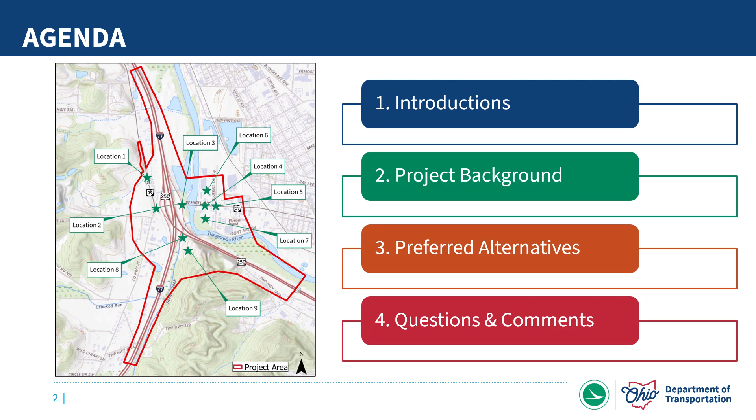Next, a brief description of the project background. Then, each preferred alternative will be reviewed in a high level of detail. The presentation will finish with next steps for the project and instructions on how to provide public feedback.

The Ohio Department of Transportation, or ODOT, District 11 is leading the Alternatives Evaluation Report. The ODOT team present for today's open house includes Tom Corey, District Deputy Director; Wasim Khalifa, Capital Programs Administrator; Scott Warner, Planning Engineer; Jared Geog, Construction Engineer; Dan Lorenz, Local Public Agency Manager; David Hoffman, Highway Safety District Coordinator; Steve Lucas, Real Estate Administrator; Thomas Stratton, District Environmental Coordinator; Elizabeth Crail, Environmental Specialist; and Lauren Burrell, Public Information Officer.

Several firms have been consulted by ODOT to aid in this report. This includes Art Ramito with GAI Consultants as Design Manager, myself and Sam Robbins with Stone Environmental, Engineering, and Science for Public Involvement, and Len Michaels with ASC Group as the Environmental Project Manager.

The purpose of this presentation is to provide information to the public about the preferred alternatives and receive feedback from the public to integrate into the final alternatives evaluation report.

At the end of 2025, ODOT and the project team presented the proposed alternatives at a stakeholder meeting and open house. Each of the 9 project locations had between 2 to 4 proposed alternatives. The project team then used stakeholder and public feedback to help advance one preferred alternative per location.

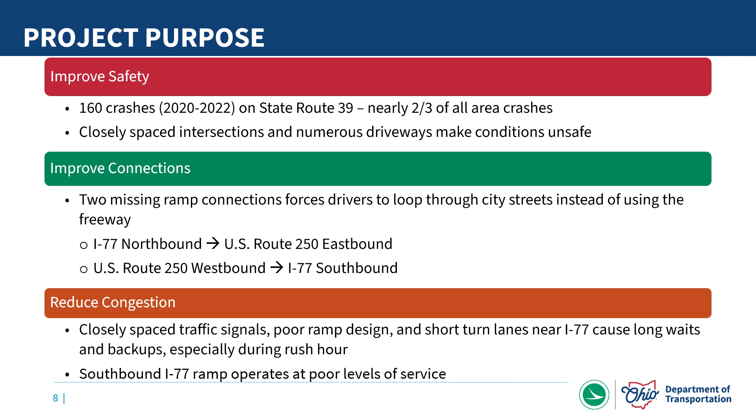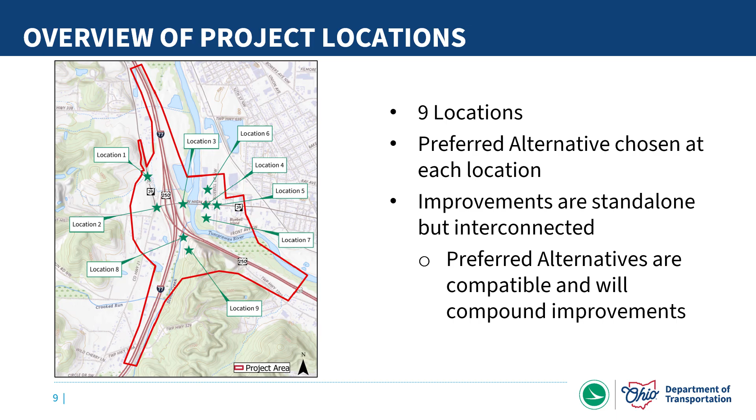Let's review how preferred alternatives were selected. Last year, the project team evaluated several proposed alternatives for safety, traffic operations, environmental impacts, right-of-way acquisition, and cost. After the 2025 stakeholder meeting and open house, the project team included public opinion and certified traffic data as additional evaluation criteria to identify a combination of preferred alternatives that work optimally across all locations.

The new public opinion criterion is a combination of feedback received from the 2025 stakeholder meeting and open house. The certified traffic data criterion evaluated how the proposed alternatives would stand against forecasted traffic projected into the 2050s, while taking into account potential developments in the surrounding area. Certified traffic data is the most comprehensive, robust data available and the highest standard of forecasting. This data was used to reevaluate traffic operations and make modifications to designs to improve traffic and safety.

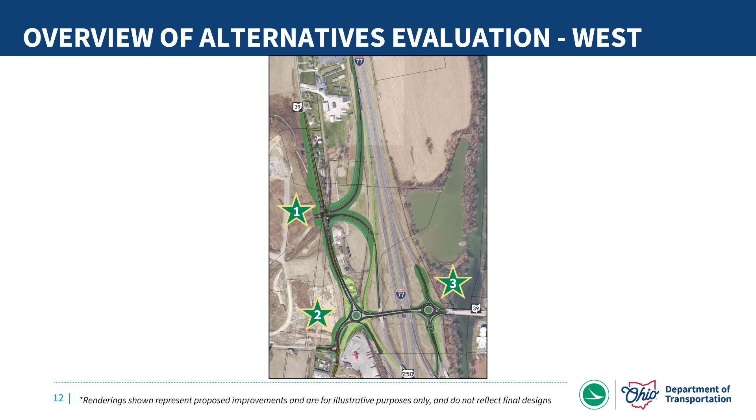The largest change at these locations from what was presented at the first public meeting is the relocation of the US Route 250 eastbound entrance ramp from location 2 to location 1. After receiving certified traffic data, it was determined that further improvements to traffic operations and safety could be established with this relocation, as it reduces the westbound left turn movements at location 2 and replaces them with a continual right turn bypass lane.

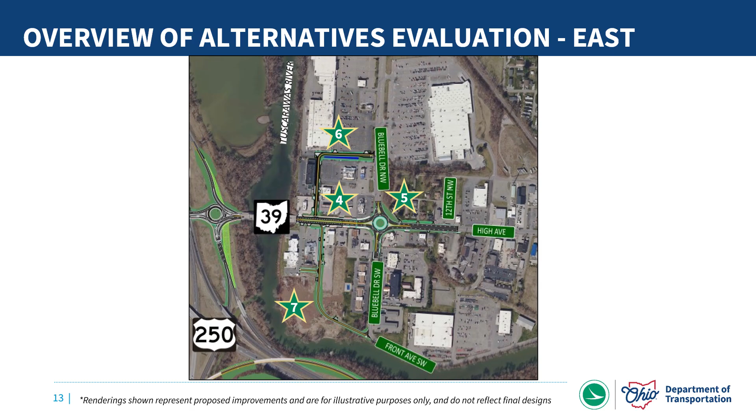Locations 4, 5, 6, and 7 are located east of the Tuscarawas River. Location 4 is the area between the bridge over the Tuscarawas River and Bluebell Drive. Location 5 is the intersection of State Route 39 and Bluebell Drive. Locations 6 and 7 are north and south backage roads, respectively, off State Route 39.

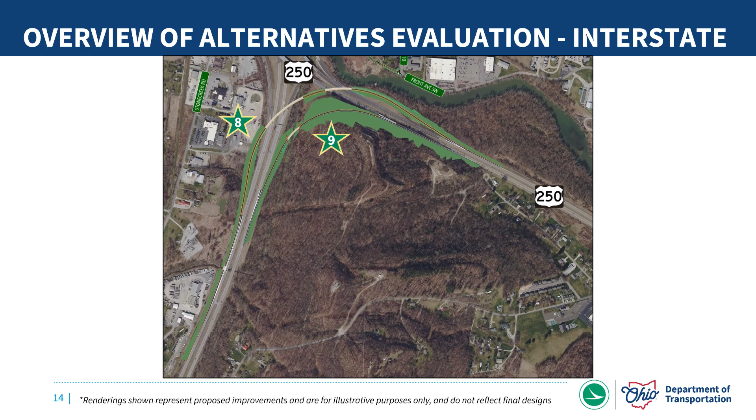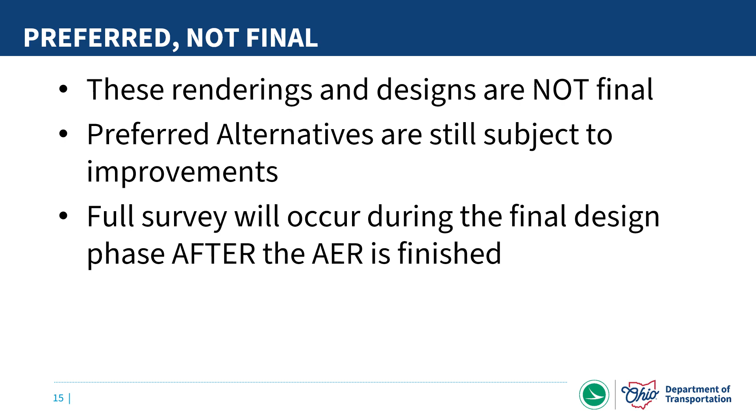Before looking at each location in more detail, we again emphasize that these are not final designs. The preferred alternatives will be further developed during the final design phase based upon full survey of right-of-way, geotechnical, utilities, and other relevant investigations. Location 1 is located along State Route 39, north of Stonecreek Road.

At Location 1, 3 proposed alternatives were originally presented: a traditional intersection, a roundabout, and a no-build option. The build options would improve traffic flow and the intersection configuration at Stonecreek Road, as well as improve the overall traffic movement and safety within the project area by relocating the I-77 southbound exit ramp to Location 1.

The traditional intersection was modified based on projected traffic data and chosen as the preferred alternative. The modifications include relocating the US Route 250 eastbound entrance ramp from Location 2 to Location 1. This would provide a safer ramp alignment from the existing ramp alignment and reduce the left turns at the State Route 39 and Stonecreek Road intersection, improving traffic flow and safety.

To accomplish this, additional lanes were added at the intersection to account for increased traffic, including a northbound right turn slip lane to allow traffic to continually enter US Route 250 eastbound with a yield condition.

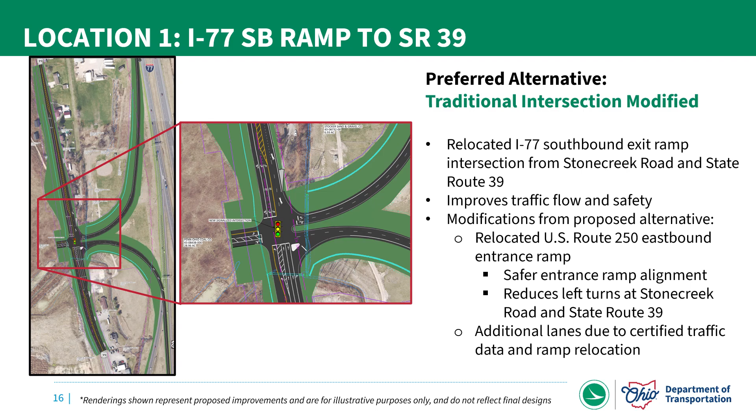The evaluation matrices were all updated to rate the proposed alternatives using the latest available data and new criteria. Each alternative is graded based upon safety, traffic operations, environmental impacts, right-of-way impacts, cost, and public input. If an alternative scores well in a category, it receives a full circle. If it performs fair, it receives 3/4 of a circle. If it only performs satisfactory, it receives half of a circle.

Unsatisfactory impacts receive a quarter of a circle, and if an alternative performs poorly, it receives an empty circle.

At each location, we evaluated a no-build option. In every situation, the no-build option costs $0 and will not have any impact on right-of-way or the environment, as current conditions would be left unchanged.

Location 2 is the intersection at Stonecreek Road and State Route 39. At Location 2, 3 proposed alternatives were originally presented: a traditional intersection, a roundabout, and a no-build option. The build options included the relocation of the I-77 southbound off-ramp to the north leg of State Route 39, as shown previously in Location 1.

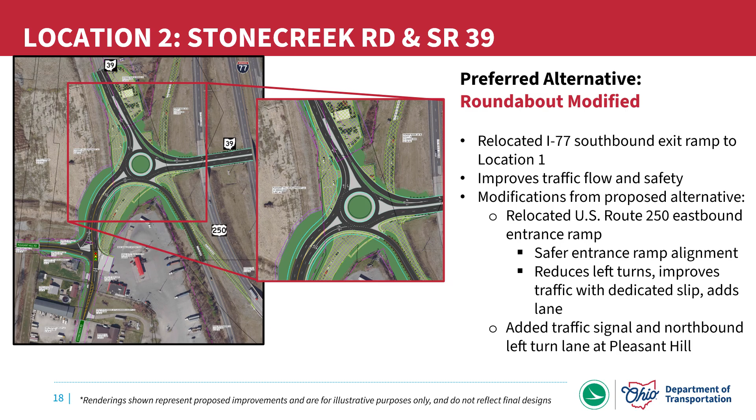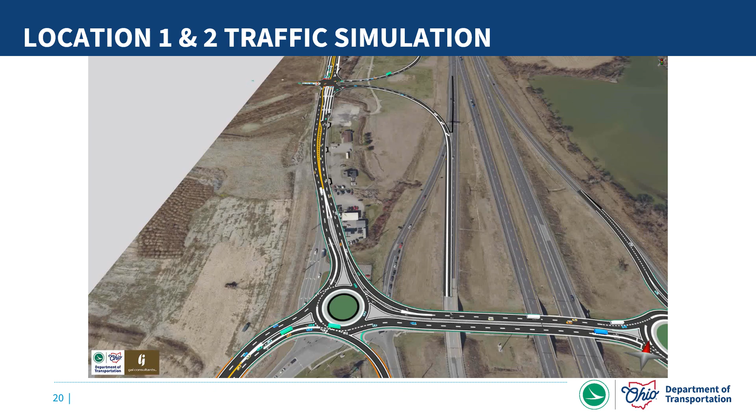Location 3 contains the I-77 northbound entrance and exit ramp intersection on State Route 39. At Location 3, 2 proposed alternatives were originally presented: a roundabout and a no-build option.

Based upon certified traffic data, several enhancements were made to the roundabout design, which was then selected as the preferred alternative. These enhancements include adding a second northbound left turn lane, a northbound and a westbound right slip lane, and installing a pedestrian crossing with rapid flashing beacons on the south leg.

A metering signal can be added at this pedestrian crossing in future years to act as a metering lane if the left turn volume increases to the point where it restricts westbound traffic from entering the roundabout.

This option would not only improve traffic and safety at this location, but would also provide full circulation in conjunction with the proposed roundabout at the Bluebell Drive intersection for businesses along State Route 39 east of the Tuscarawas River.

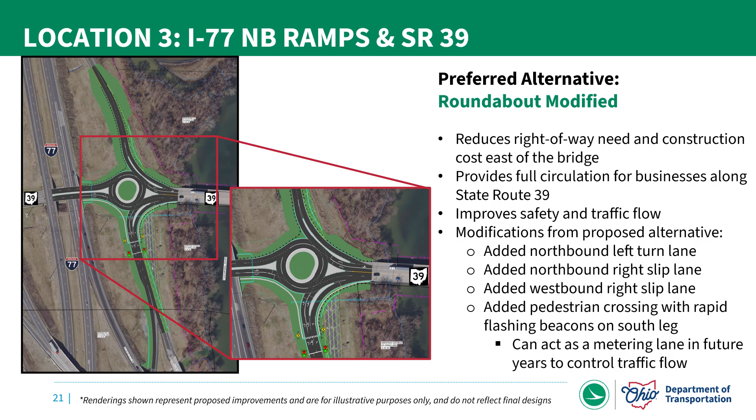The evaluation matrix above shows the roundabout modified as the preferred alternative. While higher in costs, the preferred alternative is safer and has a higher level of traffic operations than the other alternatives. Additionally, the roundabout modified is contained within the existing ODOT right-of-way, so no additional right-of-way is anticipated.

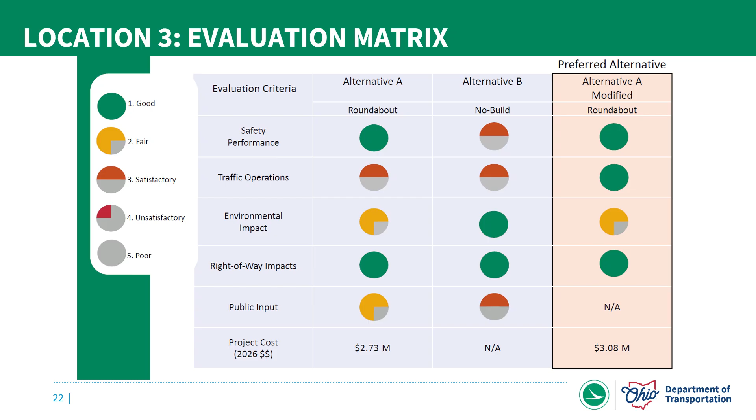Finally, the roundabout modified also helps traffic movement along State Route 39 due to the proposed center median along State Route 39 east of the Tuscarawas River and the proposed roundabout at the Bluebell Drive intersection.

Location 4 is the stretch of State Route 39 from the bridge over the Tuscarawas River to the Bluebell Drive intersection. At Location 4, 3 proposed alternatives were originally presented: a concrete median along the center of State Route 39 with no pedestrian facilities along the road, a concrete median and pedestrian facilities along the road, and a no-build option.

The center median would reduce left turn and rear end crashes in this section of the project area. Both build options included a center westbound left turn lane to provide connectivity to businesses. The alternative with pedestrian facilities was the selected preferred alternative, with a slight modification.

Because a roundabout was selected as the preferred alternative at Location 3, the center westbound left turn lane would not be needed, as westbound traffic wanting to visit the businesses on the south side of State Route 39 could travel to the roundabout and make a safe U-turn.

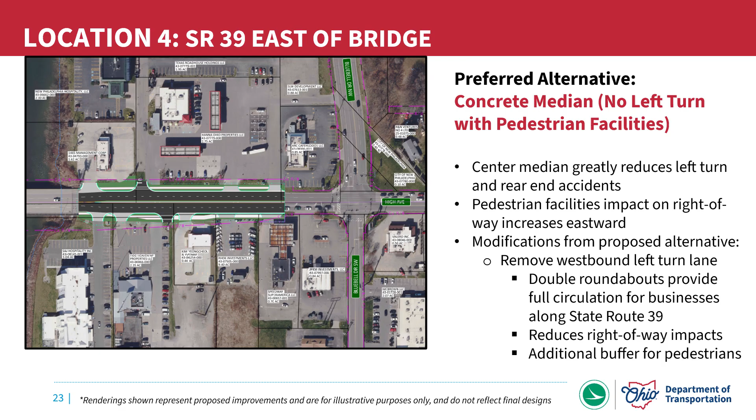By removing the center westbound left turn lane, the right-of-way impacts along State Route 39 are reduced, costs decrease, and an additional buffer is provided for pedestrians between the sidewalk and State Route 39.

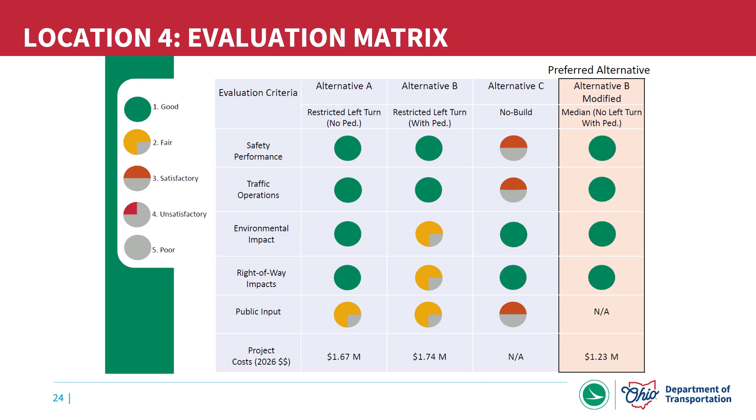The evaluation matrix above shows the concrete median, no left turn with pedestrian facilities, as the preferred alternative. This alternative has the least costs, less right-of-way and environmental impacts, and a buffer between pedestrian facilities and the road.

Location 5 is the Bluebell Drive and State Route 39 intersection. At location 5, three proposed alternatives were originally presented: a centered roundabout, a roundabout shifted northeast, and the no-build option.

Both roundabouts would greatly improve traffic flow, reduce congestion, and improve safety over existing conditions. The roundabout shifted northeast was selected as a preferred alternative, as it would minimize impacts to parking at adjacent properties compared to the centered roundabout. The roundabout shifted northeast may still impact parking at adjacent businesses and may require the replacement of the retaining walls protecting the houses on the northeast side of the intersection. Continued refinement to the roundabout will be accomplished during detailed design to further reduce the right-of-way and parking impacts.

Roundabouts at both locations 3 and 5 would also allow for circular movement on State Route 39, allowing full access to businesses on both sides of State Route 39.

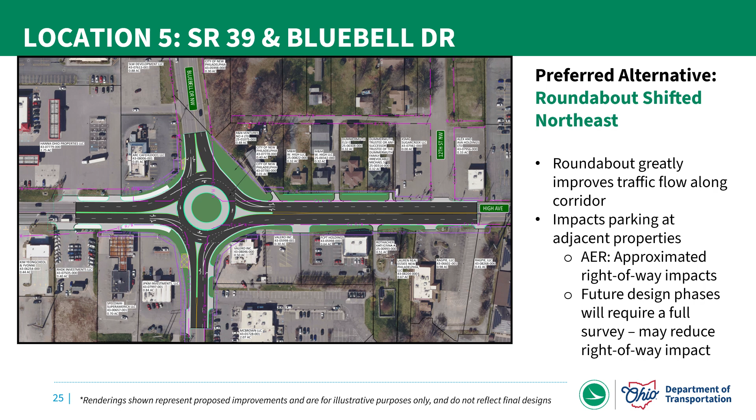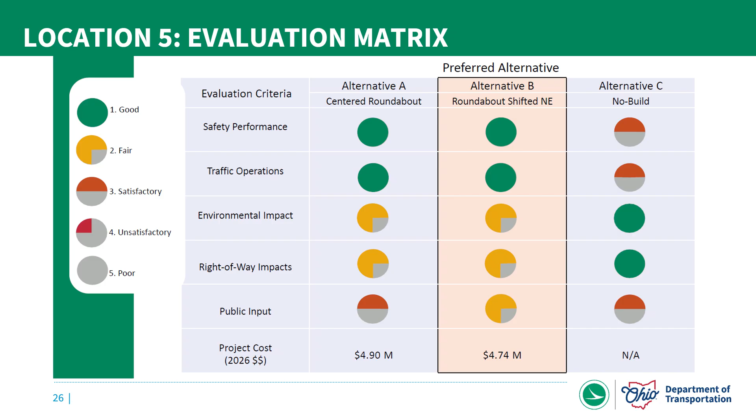Location 6 is a proposed backage road north of State Route 39 connecting to Bluebell Drive Northwest. This roadway will help provide connectivity between businesses and reduce the traffic at the State Route 39 and Bluebell Drive intersection. The existing driveway is already treated as a road by many drivers in the area.

Converting the driveway into a dedicated road would provide safety improvements, as the new road would control the access points to the proposed backage road. This roadway would also serve as a detour route during the proposed construction at the State Route 39 and Bluebell Drive intersection.

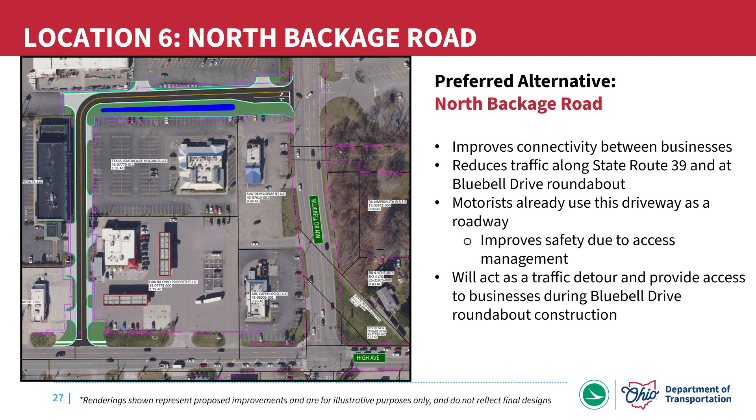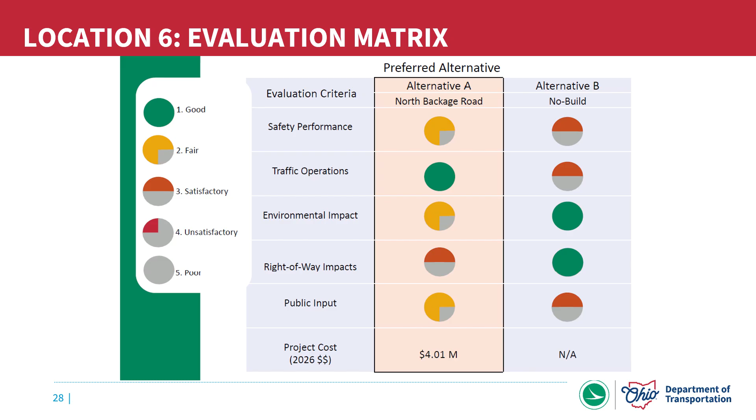The evaluation matrix above shows the north backage road as the preferred alternative. While higher in right-of-way impacts, this alternative is safer, has a higher level of traffic operations, and is favored by the public.

Location 7 provides a backage road on the south side of State Route 39 connecting to Bluebell Drive Southwest. This option would provide connectivity to businesses south of State Route 39 and to downtown New Philadelphia. The backage road would also reduce traffic along State Route 39 and at the Bluebell Drive intersection.

Like the north backage road, the south backage road would be used as a detour during the construction of the proposed roundabout at the State Route 39 and Bluebell Drive intersection. This option would also open the land south of State Route 39 to possible further development.

The edge of this proposed build would run along the property line between the existing restaurant and oil change facility and provide a retaining wall near the property line to reestablish lost parking spaces due to the new roadway.

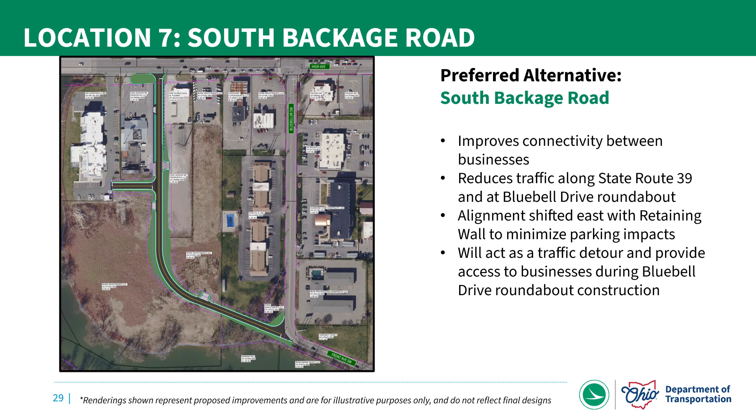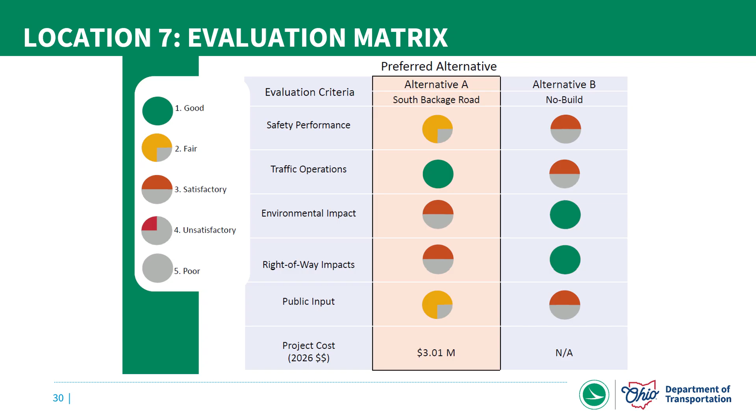The evaluation matrix above shows the south backage road as the preferred alternative. While higher in right-of-way impacts, this alternative is safer, has a higher level of traffic operations, and is favored by the public. Location 8 addresses improvements to the U.S. Route 250 westbound to I-77 southbound movement.

At location 8, four proposed alternatives were originally presented: a 40-mile-per-hour flyover ramp, a 55-mile-per-hour flyover ramp, a Texas U-turn, and a no-build option. The Texas U-turn was discarded as a preferred alternative early in the evaluation process, as it would have more impact on the existing bridges, had several areas where the design would not meet design standards and would require exceptions, cause motorists to make drastic reductions in speed to make a 180-degree turnaround, cause significant impacts to the traveling public during construction, and was unfavored by the public.

The 55-mile-per-hour flyover ramp was selected as the preferred alternative, mainly as it is the safest. Because both I-77 and US Route 250 have 75-mile-per-hour design speeds, the 55-mile-per-hour flyover ramp is safer than the 40-mile-per-hour flyover ramp, as drivers will not have to slow down as much when transitioning speeds.

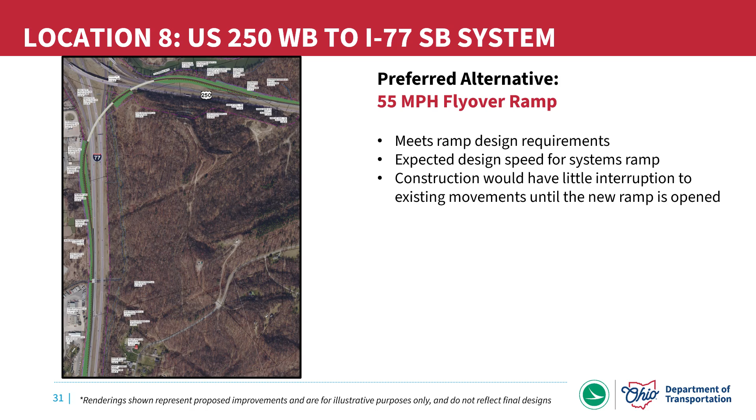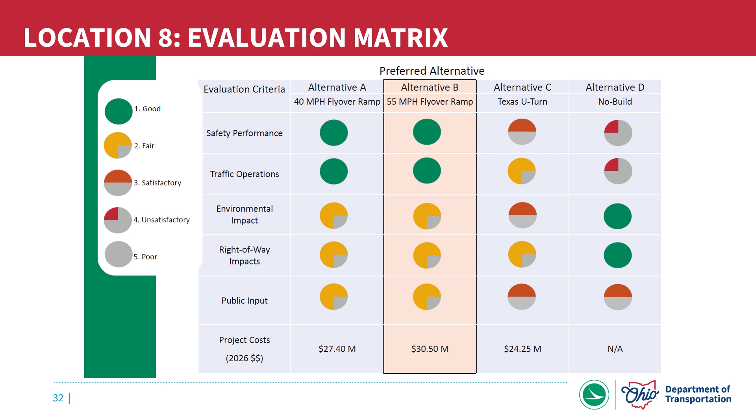Additionally, this alternative is able to be constructed mainly offline, meaning construction would have little interruption to existing movements until the new ramp is opened. The evaluation matrix above shows the 55-mile-per-hour flyover ramp as the preferred alternative. While higher in costs, the preferred alternative is safest, has the highest level of traffic operations, and is favored by the public. Location 9 addresses improvements to the I-77 northbound to US Route 250 eastbound movement.

At Location 9, three proposed alternatives were originally presented: a 40-mile-per-hour ramp, a 55-mile-per-hour ramp, and a no-build option. The 55-mile-per-hour ramp was selected as the preferred alternative.

Because both I-77 and US Route 250 have a 75-mile-per-hour design speed, a smaller transition between speed limits from the freeway to the ramp is safer for motorists. The 55-mile-per-hour ramp also has a shorter bridge requirement compared to the 40-mile-per-hour ramp.

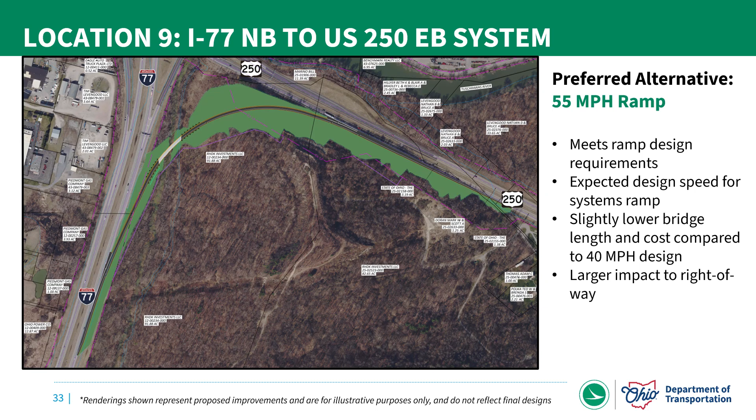Similarly to Location 8, this alternative is also able to be constructed mainly offline, meaning construction would have little interruption to existing movements until the new ramp is opened.

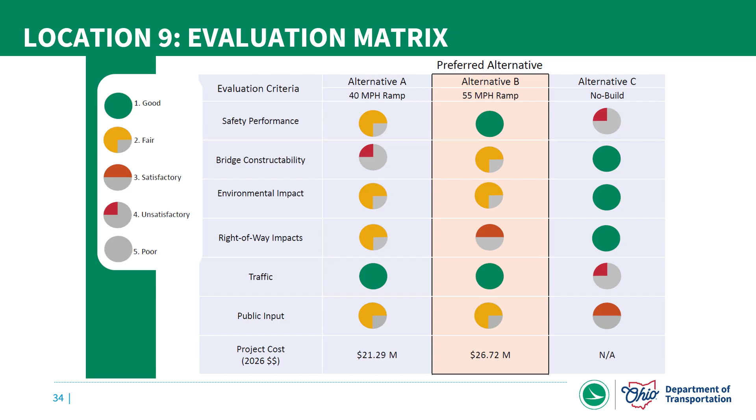The evaluation matrix shows the 55-mile-per-hour ramp as the preferred alternative. While higher in costs and right-of-way impacts, the preferred alternative is safer and requires less bridge construction.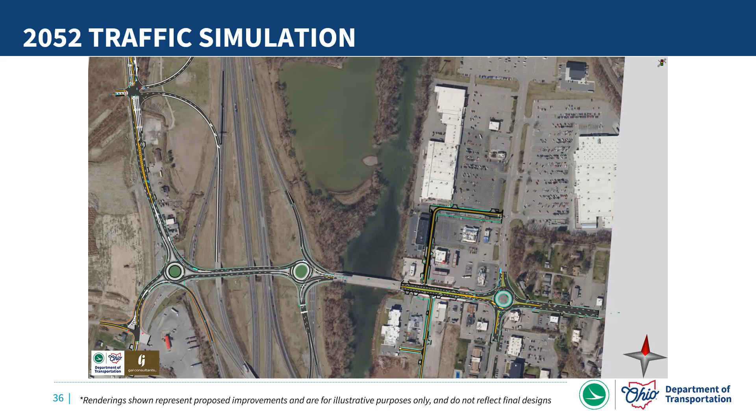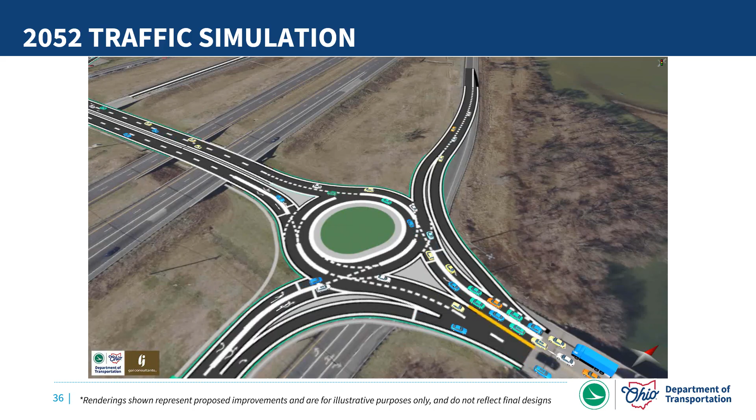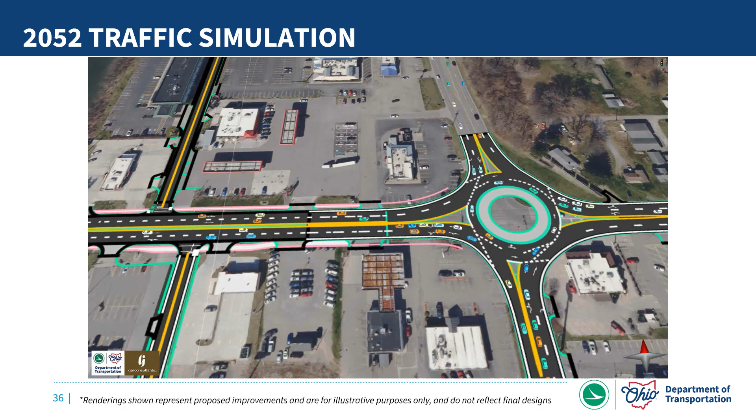This slide shows the traffic simulation for the improved local road network with projected 2052 peak hour traffic volumes. Shown now is Location 1, the southern portion of Location 2, Location 2 proper, Locations 2 and 3, Location 3, Locations 3, 4, 5, 6, and 7, and a closer look at Locations 4 and 5. Traffic flow is greatly improved compared to existing conditions for the next 20+ years.

Ideally, all preferred alternatives would be constructed at the same time. However, because funding may not be available all at once, the project could be completed in phases, with different sections built as funding is secured.

In that case, ODOT may propose to phase the construction of the locations east of the Tuscarawas River first. Preferably, Locations 6 and 7 would be constructed first to act as a detour for construction at Locations 4 and 5. Next, Location 1 would be constructed to relieve congestion at Location 2 by relocating the I-77 southbound exit ramp and US Route 250 eastbound entrance ramp to Location 1.

Then, Location 2 would be phased. Last, Locations 8 and 9 would be constructed mainly offline. Even if the project is phased, the construction of any preferred alternative would have a noticeable benefit on traffic in the project area.

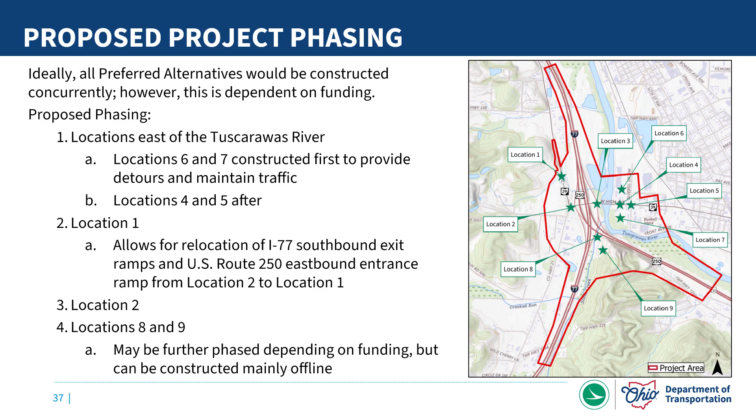Following this open house, the project team will incorporate stakeholder and public feedback into the AER, finalize the report, and begin the funding application process.

This open house concludes public involvement events for the AER. However, the project team will accept questions and comments regarding the project at any time. The project team anticipates finalizing the AER and beginning the funding application process by the end of the summer.